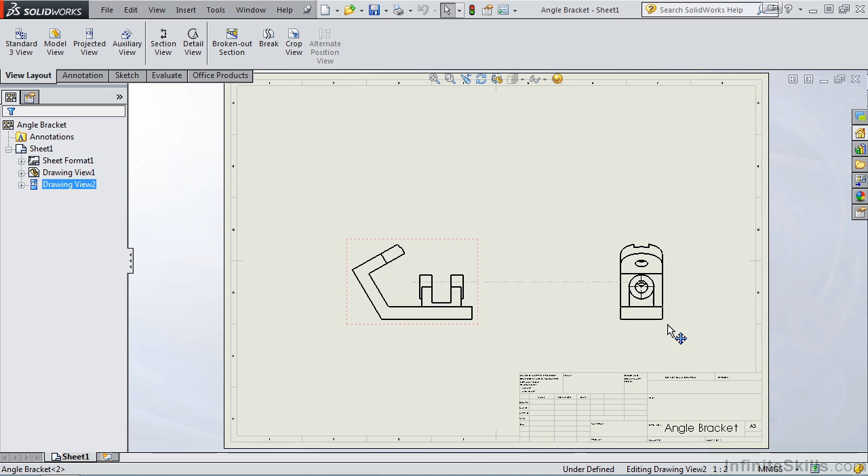Now, before we start the broken out section command, I am going to move these two views over to the right. I'm going to select the front view, scroll down, and change my display style. Currently, my display style is not displaying the hidden line type. I want to change that. So I'm going to select the hidden lines visible, and notice hidden lines are visible in both views.

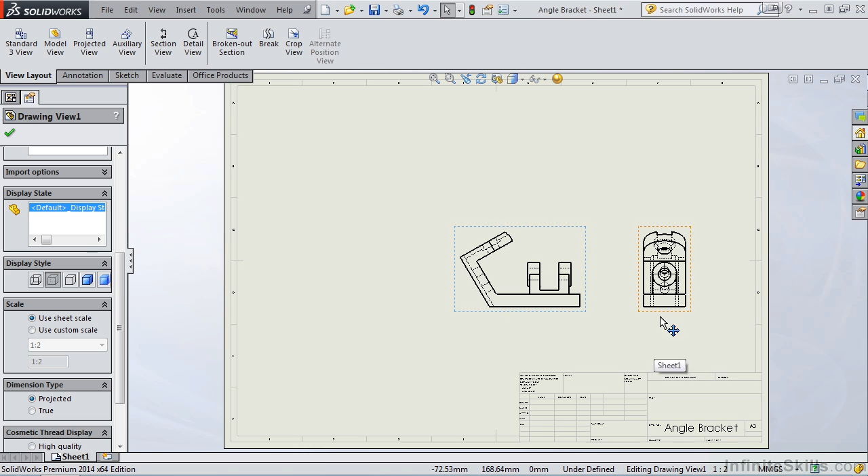Now, why did it update in this view? It's because this is the parent view, and I made the change to the parent view. So that change is reflected in the child. Now, before we get into the broken out section, let's create an auxiliary view from this edge here. And the reason I created this auxiliary view, I wanted to show you that these hidden lines that you see here are these two holes here.

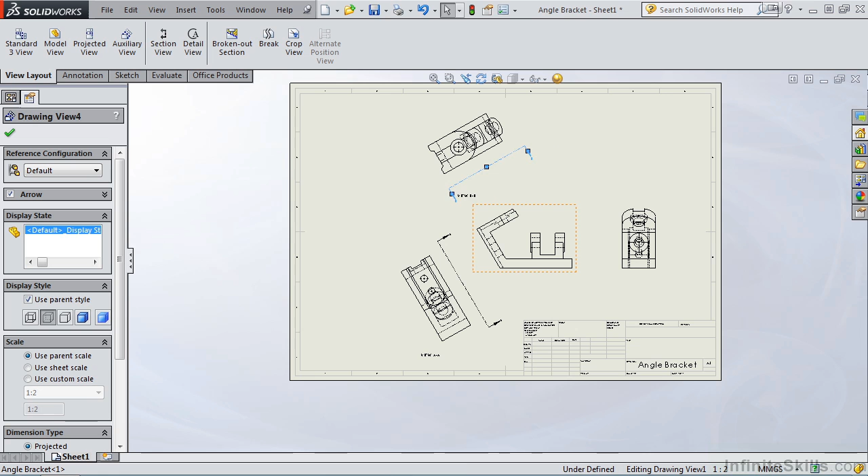Let's go ahead and create another auxiliary view and move the viewing line, size it down a bit, seems a bit large, and reposition the label. Now we're ready to start our broken out section. What I want to do is break out this corner of the part and look inside of the part. So I'm going to zoom up on that area. And before I do that, I want to see how deep the part is. I'm going to put a smart dimension on this auxiliary view, and we see it's 64 millimeters deep.

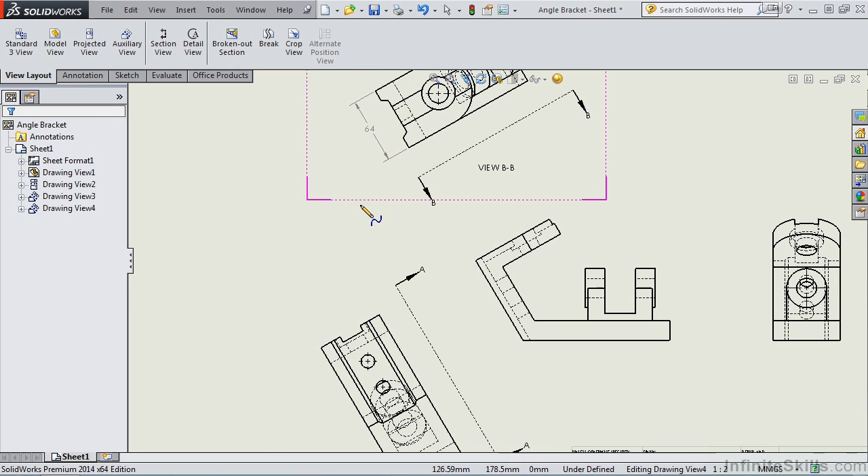I'm going to go back to my view layout ribbon, select the broken out section icon, and my cursor has changed to a pencil with a spline. Now what I need to do here is create a spline for the area I want to create the broken out section for. And this spline needs to be a closed spline, so as soon as I close it, you'll see my property manager reappear.

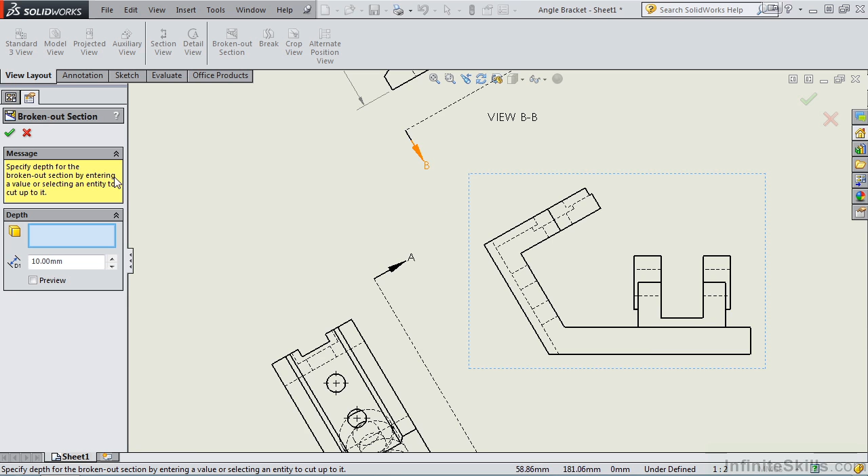Now, how deep do we want to create that broken out section into this part? There's a couple ways you can specify that. If you select inside of this window here, and then go up to the top view, for example, you can select an entity, and that would specify the depth. Or you can key in a value. Let's go ahead and try to key in a value. I am going to key in 20. Let's go ahead and select preview, and notice the preview for the broken out section.

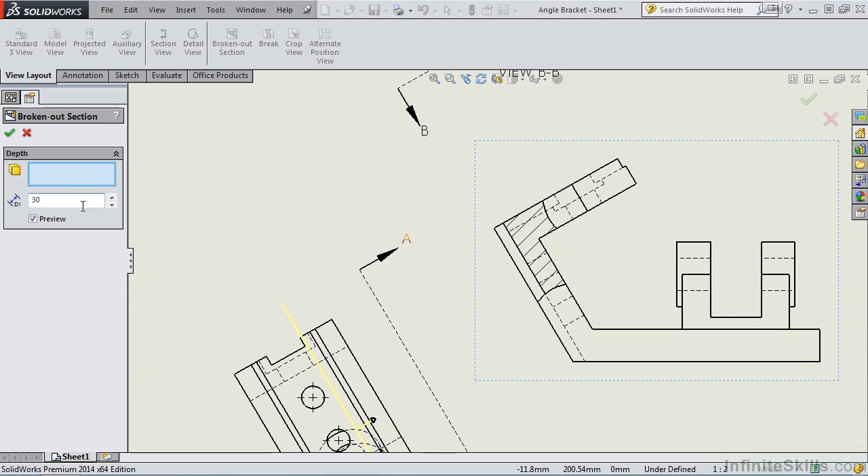Let's go ahead and change that to 30. And notice the preview again. And if we zoom up, you see a couple lines here. These two lines are required when you do a broken out section, and that's part of that spline that I created at the early stages of this command. So this is how we create broken out sections with the SolidWorks software. It's very intuitive and very user-friendly.